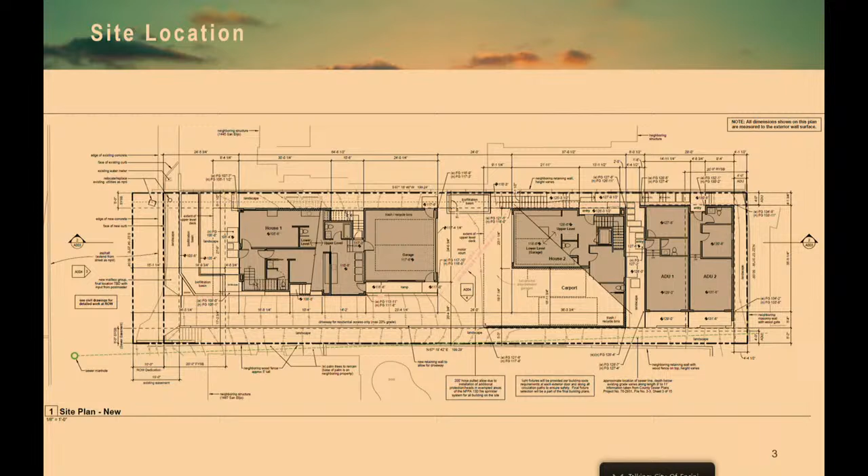The Encinitas Municipal Code requires parking to be provided at 2 spaces per single-family dwelling. The project will provide 2 parking spaces within an enclosed garage for each single-family dwelling. Per Encinitas Municipal Code, at least 1 parking space shall be required for each accessory dwelling unit unless it has a qualifying instance, such as being located within half a mile of public transit. In this case, the project is within half a mile of public transit, so it's not required to provide parking for the accessory dwelling units. However, the project is providing one off-street parking space for each accessory dwelling unit within the carport.

The proposed project is subject to the Encinitas design standards and guidelines. The project is consistent with the objective design standards. The landscape standards are met by providing a variety of plant materials, including native plants, and consistency with the landscape design matrix. The architecture design standards are met by providing building articulation with variation in materials and colors, and at least 3 of the 4 building facades incorporate windows. I would argue this one has even more than that.

The property has a slope greater than 10%. Therefore, a reduced height limit applies on the east side of the site, which is 12 feet for flat roof measurements as measured from the top of the slope. The accessory dwelling units are in compliance with this standard.

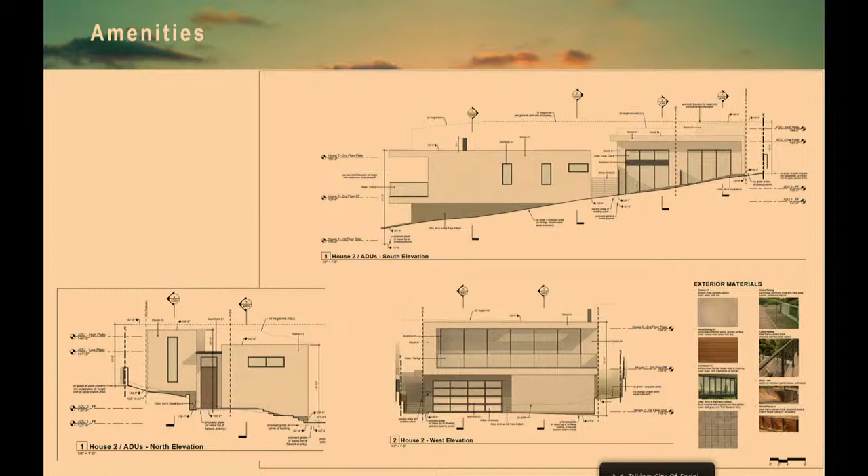Moving on, the applicant held a citizen participation program meeting at the Carnation Room at City Hall in accordance with the municipal code on October 3rd, 2023. There were 8 participants that attended that meeting. Concerns expressed included density, bulk and massing, fire-related concerns, trash management, landscape, and construction management. The applicant addressed the concerns to the extent possible in compliance with the municipal code.

Notice of this public hearing was mailed on November 21st, 2024 to all property owners and occupants within 500 feet of the project site and to anyone who requested such notice in writing, in compliance with the government code. Additionally, as a courtesy, the notice was posted at City Hall and the Development Services Department internet site under public notices.

The proposed project with conditions incorporated is consistent with the goals and policies of the general plan, the local coastal plan, and demonstrates compliance with the applicable sections of the Encinitas Municipal Code and City of Encinitas design standards and guidelines. The findings can be made to support the approval of the design review permit and coastal development permit.

No evidence has been identified to demonstrate that the granting of these permits would have an adverse impact to health, safety, or significant adverse impact to the physical environment. Staff recommends that the Planning Commission approve the project based upon the findings and conditions contained in the attached proposed resolution of approval. The applicant team and I are available to answer any questions you may have. This concludes my presentation. Thank you.

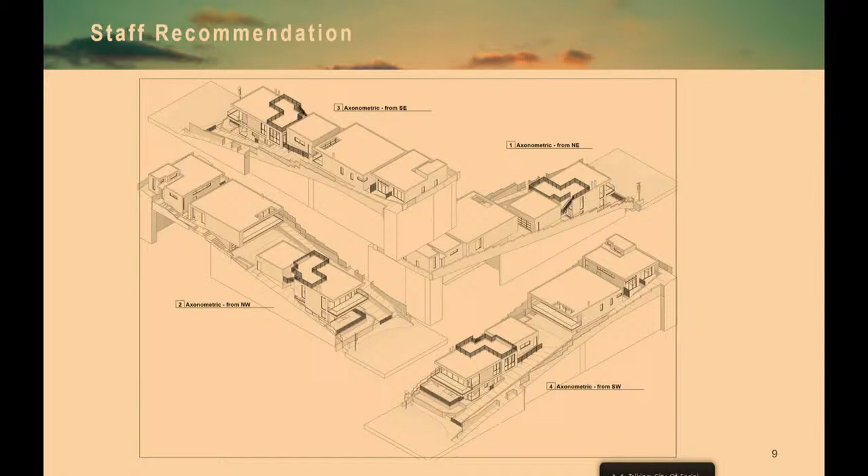Thank you very much. Are there any questions of the staff for clarification?

A couple, thank you very much. The first question I had is on page 4 of the staff report. Let me just get back up to it. Excuse me. Page 4 of the staff report talks about... I'm sorry, I'm trying to get to your calculation, or how the calculation was measured.

It says lot coverage was 40% maximum, 32.9%. But when you add up the units' square footage, it's not quite 32. Meaning house one, house two, plus the ADUs are about 1,000 square feet. To get to the 32.9, are you subtracting 800 square feet from the calculation because ADUs, 800 square feet, are exempt from the calculation? For that question, I'm going to defer to Anna, if that's okay.

Yeah, that's exactly what is occurring. State law allows for many reliefs to at least allow for 800 square feet. So that is part of the deductions of the FAR and lot coverage that is available to applicants. And that's available to any, so all ADUs have that 800 square foot measurement. Correct.

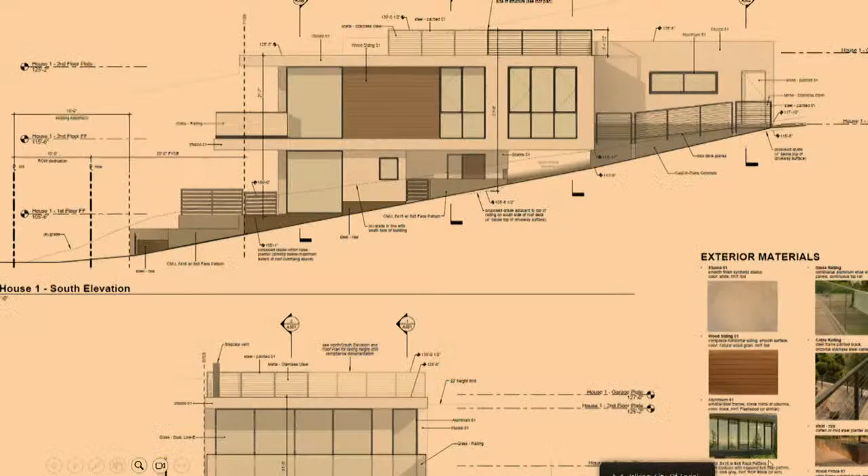This one is actually kind of a fun one. We'll look at this front elevation, the one facing the street. Let me zoom in because it's small. Okay, here we are, west elevation—again, the face facing the street. This here is measuring from the lowest point, and right now it's measuring at this 105 point. Then it comes up to here, measuring at 21.8, to the top of this roof.

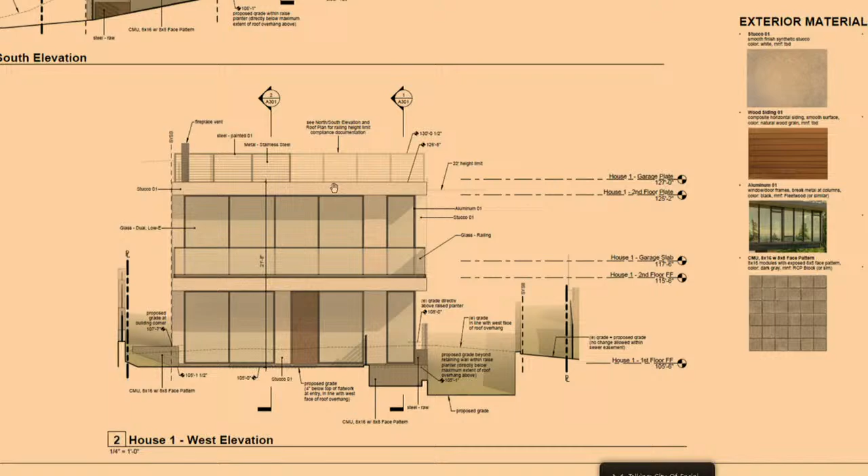That same image shown from the side, if you look at the top, actually shows clearly how it's set back. The side here, I think what Anna is explaining is this same slide: on the left is the west elevation, the front of the house. Here's the balcony, here's that roof piece, and then here is that trellising—it's stepped back and away.

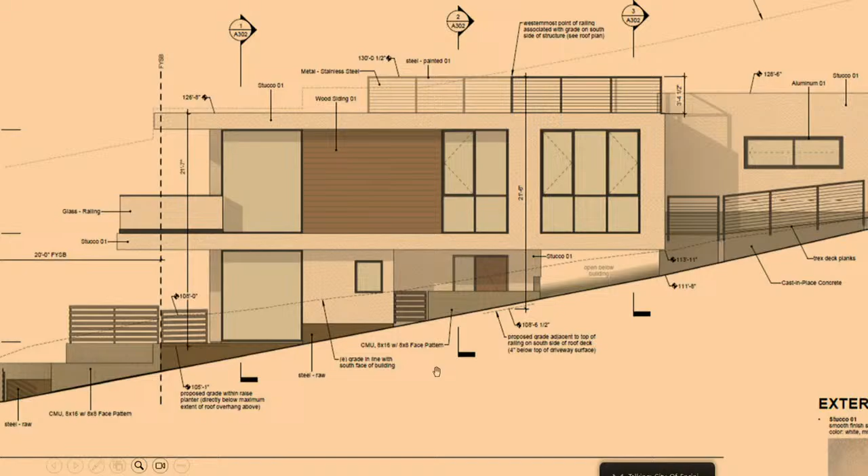Yes, that's exactly correct. And I want to point out to the commissioners that one of our work plans is to try to clean up the height measurement. I don't intend this to—I think this is correct in the way we do it currently—but it's very subjective. If that guardrail is just one foot further south, it would be equal distance between those two points, and how would you choose whether to go to the north or the south?

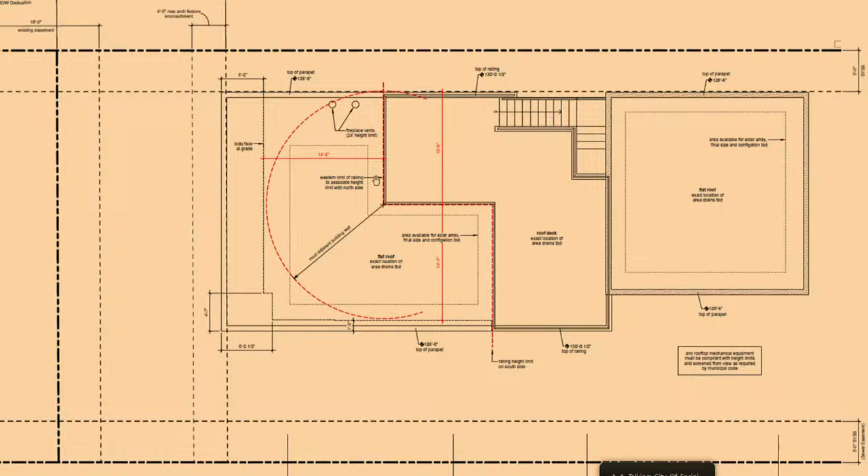I don't want to derail this conversation regarding this project, but that's an instance that may come up in our future. I like it, and thank you very much, that was very helpful.

It is very dynamic, and we don't always see something to this level of detail. That was why I was asking the questions, and it seemed to adjust the common area on the rooftop in terms of how that was formed, in terms of the railing, their design. So it was like, okay, now why isn't it just a square? So thank you very much, I appreciate that.

Thank you. While you were on that elevation, the south elevation, could you confirm for me that the municipal code allows a projection of 4 feet into a front yard setback instead of 2 feet? I'm looking at the front deck of house one. Yes, that's correct.

Where's the front of the house, the facade? To the left. Okay, got it, so on the south elevation it's going to be here to the left. So what the commissioner is pointing out is that the front yard setback is shown in this dotted line, and this balcony here is projecting out past that, and it's allowed to do that for 4 feet. Thank you.

Could you also confirm for me that the site walls in the front yard setback comply with our wall height? I thought I saw some diagram earlier with a really large wall in the front yard. Are all these under, is it 4 feet? Through design review, you can go above 6 feet. Okay, so are they specifically asking for, is one of the walls in the front yard higher than 6 feet, or up to 6 feet?

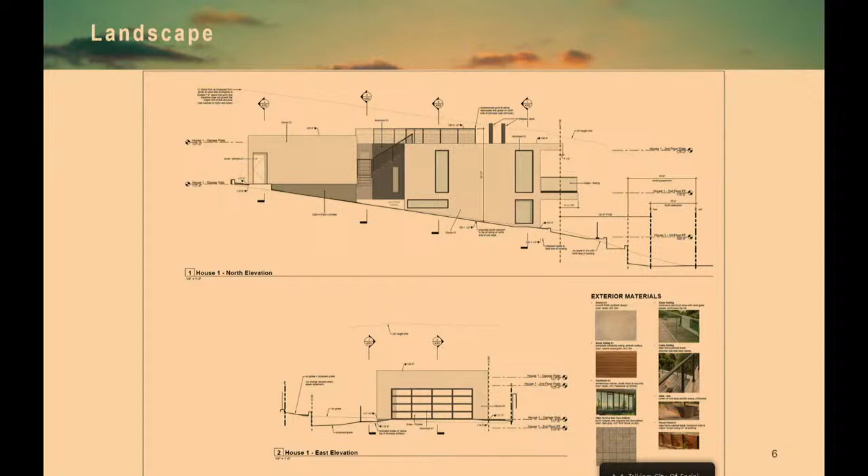And I guess I'm curious how tall that second wall is from the grade next to it. The measurements I don't have readily available here, but we did check it for compliance, and anything over the standard allowance, they have complied with.

Another interesting aspect here is that they've got a solid portion and an open portion as well, which also helps alleviate the overall height of that component.

So to be clear, in my mind, the municipal code says something like a 42-inch high wall, and the next 18 inches has to be 50% open, for up to a 5-foot barrier in the front yard. Yes, you're correct. Unless we have a DRP, and then they can request something up to 6 feet tall? Yes, although I don't think we're hitting that here.

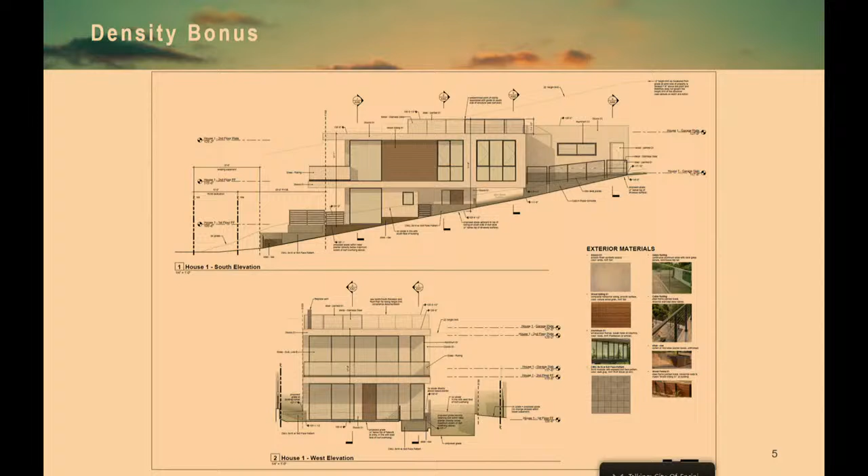So you can go up to 6 feet in the first 15 feet of a front yard setback, but 4 feet can be solid, and the top 2 feet has to be 50% open. And then beyond that, you would need a design review permit for anything over 6 feet. Okay, thank you, I appreciate that. I think I was superimposing numbers in my head.

Is there an FAR for this lot, or is it only lot coverage? Yeah, there is an FAR because it's a multifamily zone, but they've been in compliance with what's required. I didn't see it on the staff report's summary table, I saw the coverage. Could you tell me what the FAR for this property is? Yeah, I'd have to look it up.

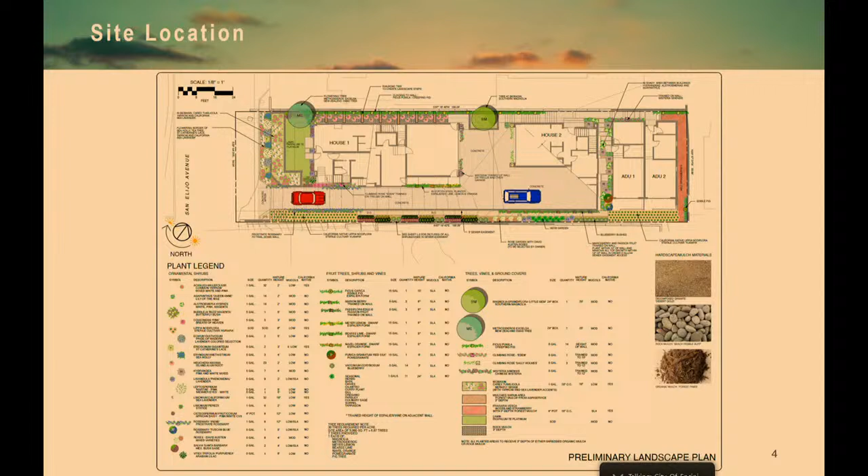Give me a moment. It's on page 131 of the packet, on the cover sheet. 0.6 is allowed, and with the ADU, they're doing 0.637. So if you see it on page 30.

Okay, you're saying with the ADU, but we can't count the ADU's 800 square feet towards that. So then they are 0.59, or... It would be 0.535.

Okay, thank you. All right, Bob, did you get your answers or clarifications? I did, it was great, and it was a great response, and I appreciate your contributions to help me. It's a lot of moving parts to it.

There was one visual though, on the east wall of the ADU that you showed in your report, and it didn't have any windows. Is that because they're only required to have windows on 3 of the 4 sides per your presentation?

It was the ADU east wall. Yeah, I see it here. Let me zoom in and look.

So that one's interesting. Let me come to this slide and share it here. So that's the house, I'm sorry, that's the house. Yeah, I guess that was in your presentation, there you go.

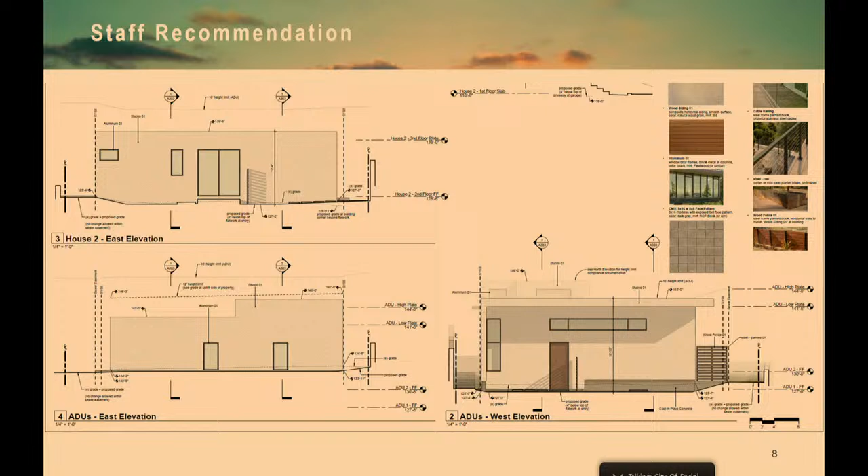If you go to the state requirements, yeah, that's a good point. So those are state requirements, correct. Okay, thank you for that, note to file. Okay, thank you very much, I appreciate your staff report.

With that, we will open up to public comment. I think we have the applicant, of course. Yes, would you please, we'll give you 10 minutes if you'd like to present your project.

Am I on? Good. I'm Tyler Van Streit, with JLC Architecture. We've got Jean-Louis, the principal architect, George, our landscape architect, and Mike and Lisa, the owners, are here as well.

I don't have a presentation, I just want to say we're happy to bring the project before you today. I think Christina's done a great job, it's been a lot of work to get to this point, so we're happy to be here. I'd echo what she said in the report about how we've sought to present the project in a compliant manner with all the applicable zoning and regulations and height. Some of those points, like the height, are a bit tricky, but I think we put the work in to get there. If there are any specific points to clarify, I could help with that, and we're here to answer any other specific questions. Thanks, okay, thank you very much.

All right, were there any questions of the applicant? Okay, we'll move to public comment. There are 3 speakers: first is Mike Seskin, followed by Michelle Crocker and Chris Crocker. So Mike, you're first.

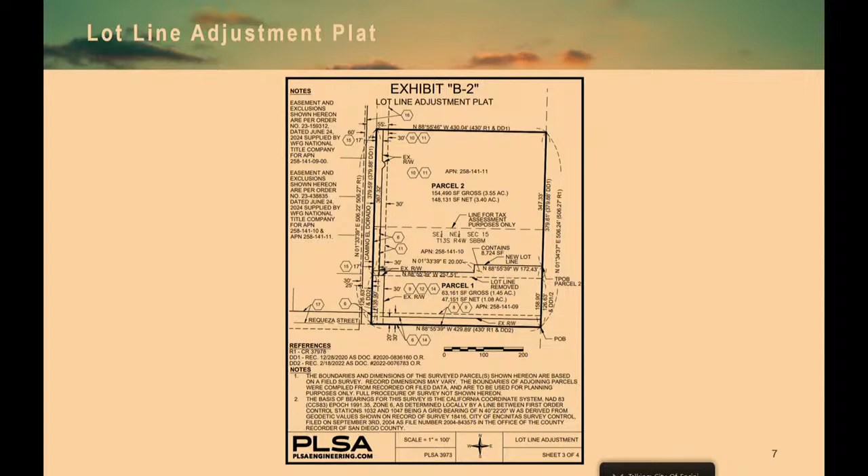Thank you, that's it. Okay, thank you very much, appreciate your presentation. Is there a speaker?

Yes, one speaker, Cynthia Van Bogart. Could you clarify for me, are you the applicant or are you not the applicant? I am a neighbor. I live at 543 Camino de Orquídea.

Thank you. I wasn't going to speak today, so I don't have anything prepared, but a couple things. It was interesting to listen to how you guys work, and I was glad that Bob saved me to be able to listen to this, because this is why I came today. There's a lot of development going on in that area.

I'm concerned about the reason for this, and you asked why, and I guess they don't have to say why. I don't know what the zoning is and I don't really understand if this changes the zoning. But in that area, it's a little cul-de-sac that goes down, with a cut-through to the grade school, and every day there's children.

Sometimes they come on their electric bikes, 3 of them were on one today. It's unsafe anyway, but for that little area, there's a lot of pedestrian traffic of children.

My concern is, given that we have something at the end of the street that is a supersized development that will add to traffic in this area, and all the schools, there's a special needs school down the street a block away, and the high school another block away, where we get a lot of traffic and children.

Okay, Planning Commission reports? We do have an update. I'm not sure if you have the link to display. And I didn't adjust much, but if we go to the next slide, we added some demographics. We're just looking in terms of a work plan at where are we and what do we have in our city. So this shows that—